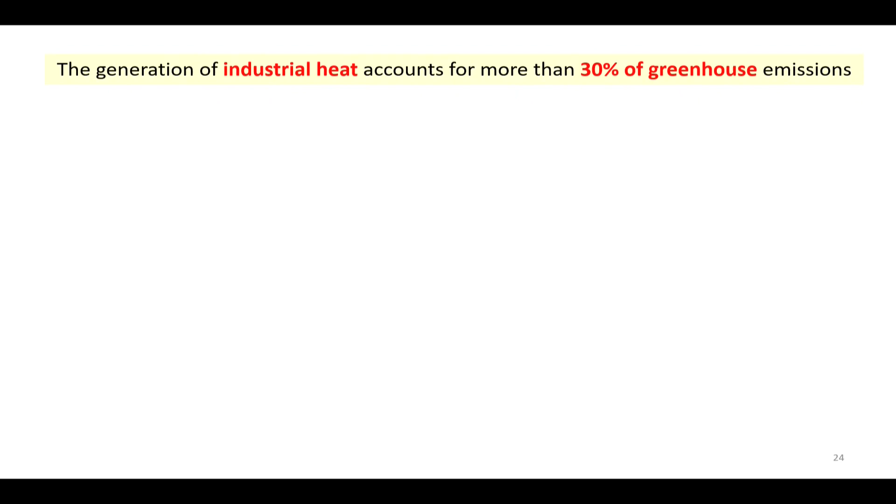The theme of the lab is to look at industrial heat. Industrial heating currently accounts for more than 30% of greenhouse emissions. And any kind of discussion about decarbonization should involve decarbonizing industrial heating.

This is why it matters. We talk about transportation—it's about 35% of emissions if you look at this pie chart. Industrial heating is almost the same amount, but we don't really talk about it much. And where people like me come in is where we talk about chemicals, manufacturing, and making materials.

That's about 20% of emissions, and that's a lot. My lab's specific theme is: can we use electromagnetic radiation to decarbonize industrial heating? I'll explain what all of that means. We use terms like process intensification.

Many times when you're cooking materials or making materials for things like your batteries or other devices, you have large furnaces running at temperatures exceeding thousands of degrees Celsius, for something on the order of 10 to 15 to 20 hours. That's a lot of wasted energy, emissions, it's dangerous. We are trying to zap these processes so that instead of applying heat for a prolonged period of time, you apply it for almost minutes.

The best example is how you microwave things at home. Microwaves are a form of directed energy that can dump a lot of energy, heat, into samples and speed up processes—sometimes the process can become an order of magnitude faster.

My lab focuses on ceramics because they are almost the non-sexy materials of the world. We need them for everything. Open up your car, there are millions of these capacitors. Open up your iPhone, thousands of these capacitors. They are ceramics, extremely stable. They're on space shuttle tiles, automotives, everything. It's a $400 billion industry, and none of us think about them.

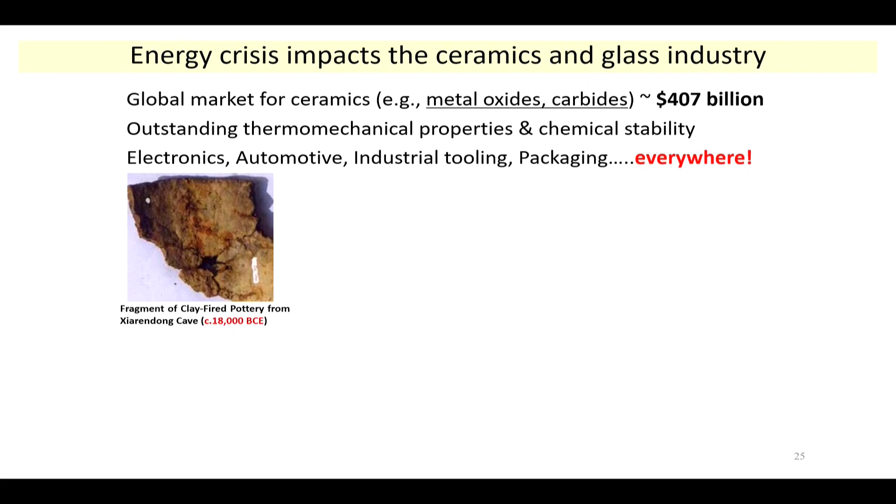They are the oldest materials humankind has made. In 18,000 BCE, we were in the caves, we shaped clay and put it into fire to make pottery. In 2024, this is pretty much the same approach of making ceramics, where we shape things and blast them with heat—a very primitive approach for a civilization that is pushing the frontiers of artificial intelligence.

These materials are in everything, including our luxury watches and other types of appendages. But when you make these materials, the emissions exceed 2 to 3 orders of magnitude over the national average for any of the nasty gases you can think about. And what is the irony here? Every material, including your electrified cars and batteries, contain these materials.

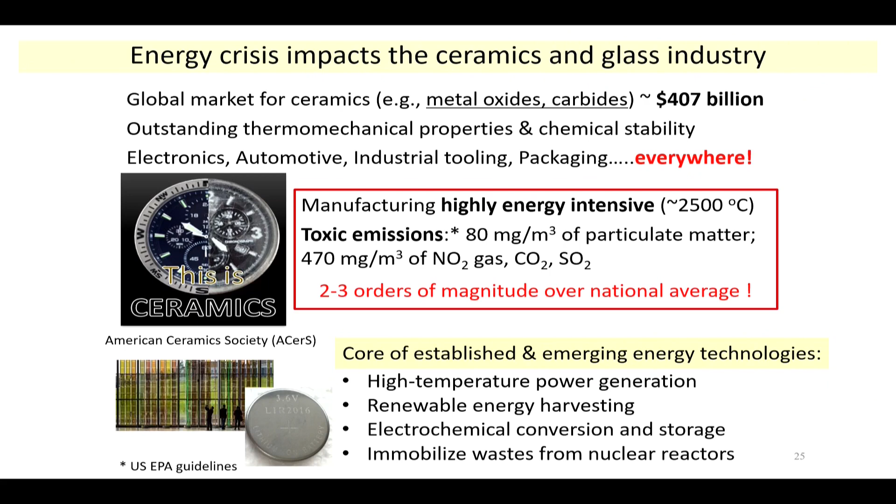So by trying to save the planet, we are going to scale up manufacturing of these materials and essentially close the loop in breaking the planet down. We need a different approach to make these materials. That's my pitch. So in our lab, we have fun trying to manipulate processes.

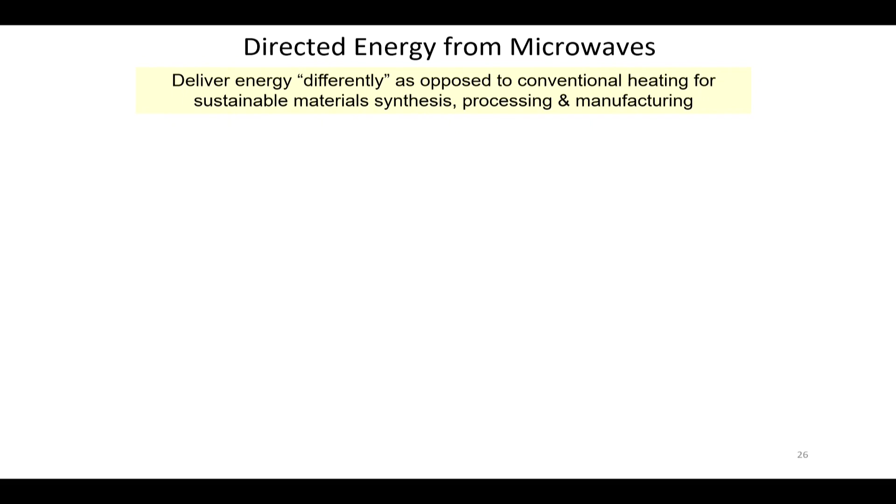One way to do this is by directed energy deposition. We dump a lot of energy into these processes, exactly how you cook in a microwave. This is a typical Friday afternoon in our lab.

Don't try this at home. Oh, this is what happens if you put metals in the microwave. Everybody tells you not to put a fork in the microwave. I'm telling you, you can go home and do it right now.

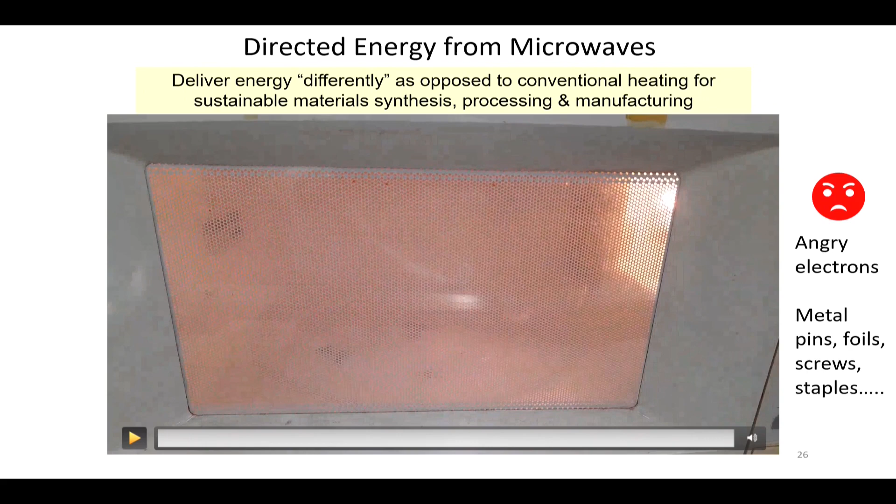You'll be fine—you have to make sure there are no paper towels or other stuff, pizzas, inside, because the sparks are electrons where a lot of energy has been dumped into them and they have nowhere to go. If you have paper towels, the electrons will jump into the paper towels and catch fire. With no paper towels, you can do this all day, and we do that in our lab. What's more dangerous is grapes, because if you microwave grapes, this happens.

Please go home and try this, okay? I'm not taking any liability. I mean, what's happening with the grapes? This is a real experiment.

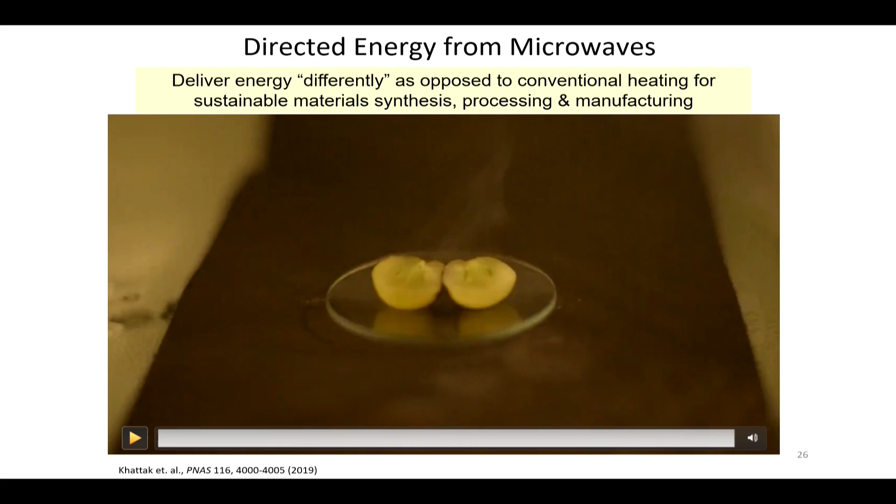Grapes are water, right? And microwaves are 2.45 gigahertz, your home microwave. The water in the grape hemisphere is coupled to the microwave, and in the gap there's an intensification of that electric field. It's so powerful a plasma is generated right at the interface of the grapes, and it ionizes all the crap that's in your microwave, and that's the plasma. We have measured the electric fields in that interface, and that's about 10 million volts per meter. It's the order of a lightning strike in a storm.

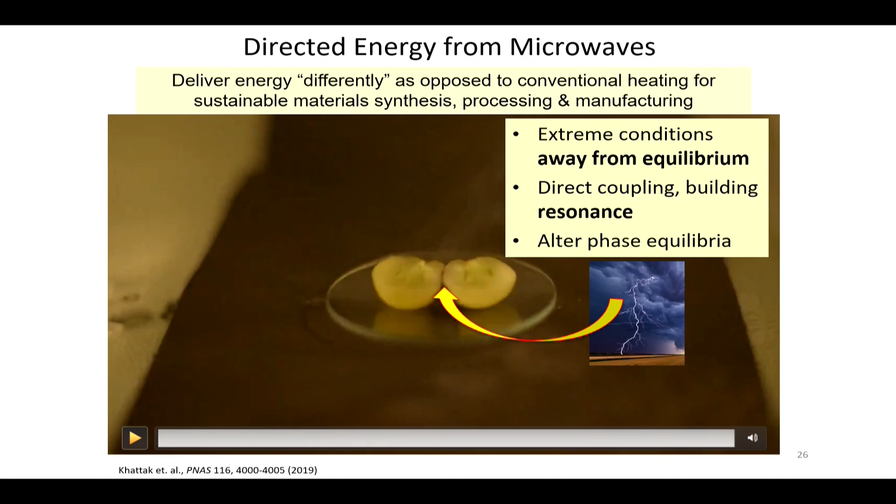So the question is, there's all this energy coming out of grapes. Why can't we use this energy for decarbonizing some of our hard-to-decarbonize processes? A lot of people in my community do that.

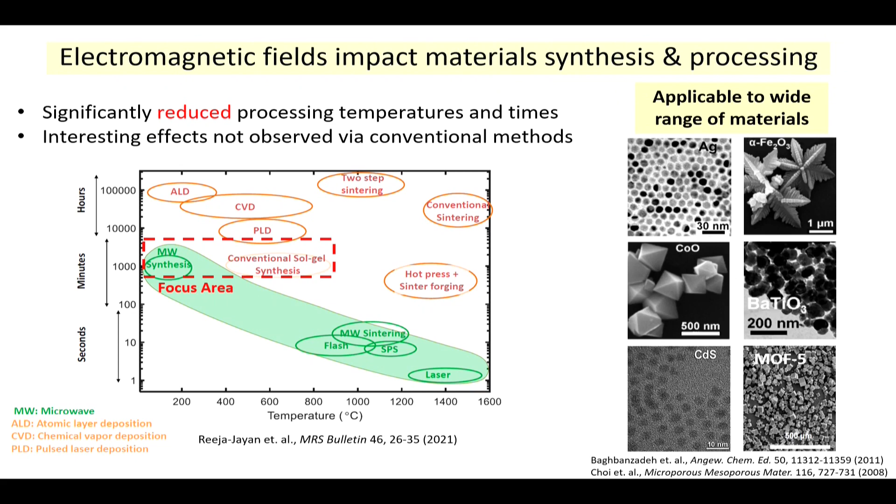These are process maps where we can change the time and temperature of various processes, shown here in different colors. When you apply these various fields, especially microwaves, you're running processes at shorter times and temperatures. Over the years, my group has synthesized an entire library of materials with all of that.

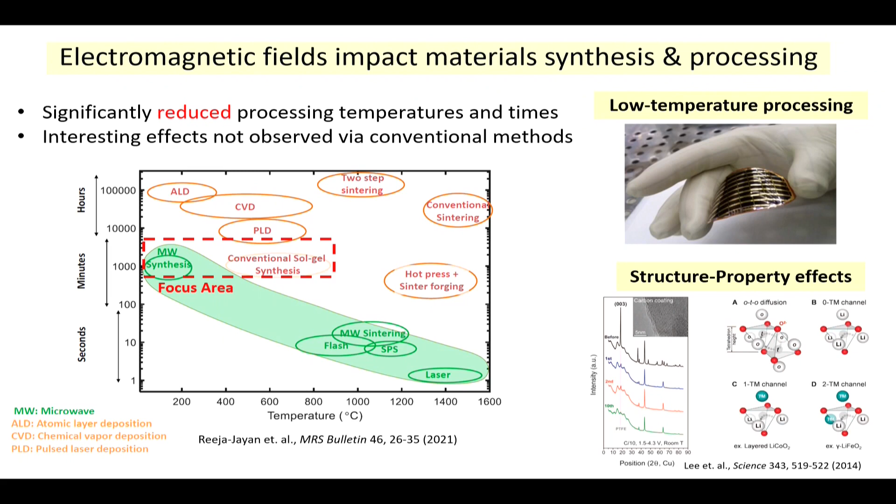The processes are very low temperature, so you can integrate ceramics with polymers, for interesting soft electronic applications. You can completely destructure the material to generate a function that is of interest to you. We have a lot of work in understanding dopants and other kinds of disorder that the field generates, but that's not the topic of interest today.

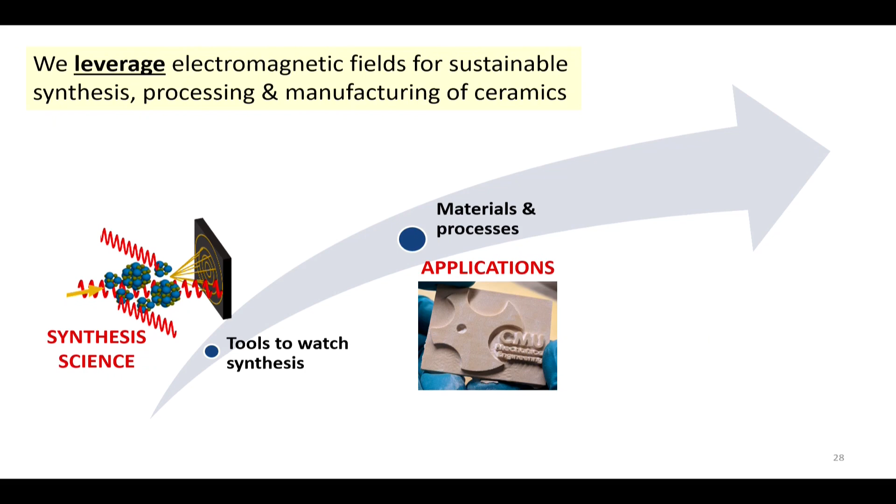Your home reactor is 1,000 watts, right? We, under certain conditions, can go up to megawatts and gigawatts with microwaves. Did you know you could do that? And with that, we can create large specimens of alumina, yttrium-stabilized zirconia, silicon carbide, and other materials.

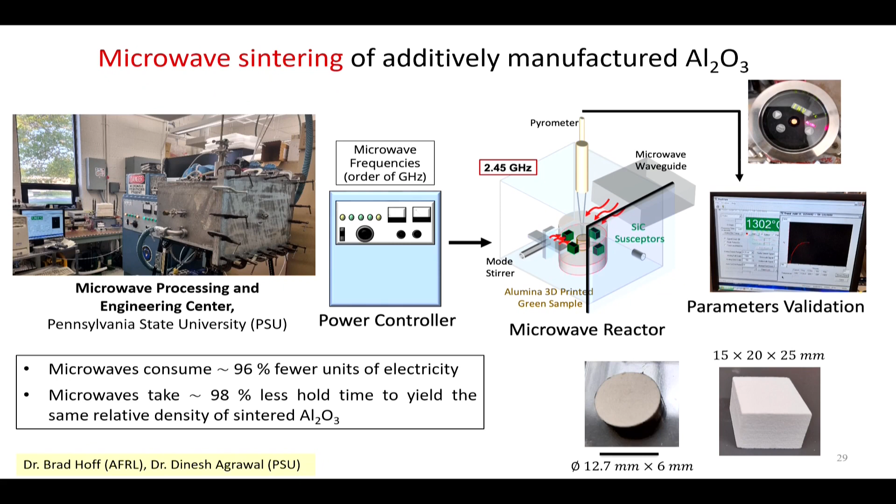We use almost 95%, 96% less electricity, because try to cook rice in a microwave versus on a stovetop — we're tapping into the same dielectric heating physics. We save all this energy mainly because we ramp up to really high temperatures in minutes as opposed to hundreds of minutes.

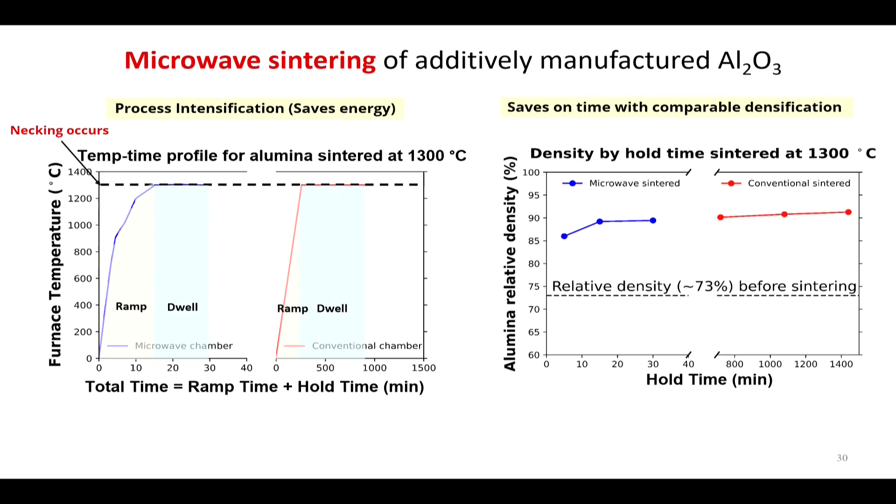We have also done extensive work characterizing the process to understand that for every minute our material is cooked in the microwave, it takes about 48 to 50 minutes in a conventional system. So this time saving is really where we save on energy.

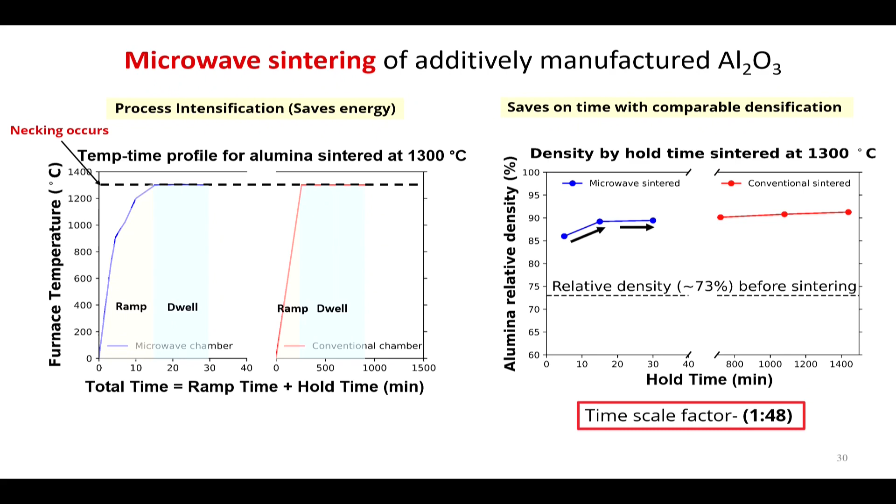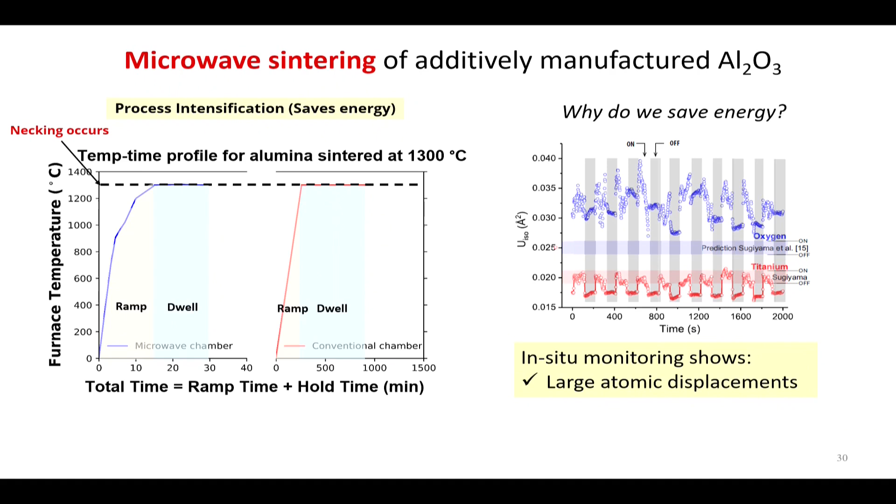My wonderful team of students and postdocs have tried very hard to understand what's happening. Very, very briefly, we actually shake atoms out of their sites so they have more space to move around, and that enhances diffusion. That's why things speed up.

We have also used this tech to print materials in all kinds of shapes, and this is an avenue for 3D printing ceramics, because you can print metals, you can print polymers, but it's extremely hard to print these ceramic things. So that's something our explorations have enabled over the years.

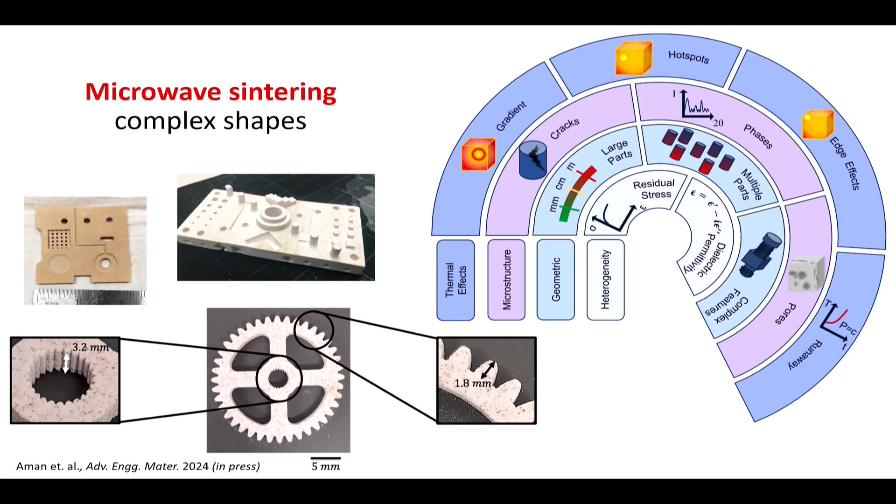This did not come easy. We had to understand the complex interrelationships between electromagnetic fields, thermal and heat transfer effects, microstructure, and other kinds of materials-related problems in these systems to come to these solutions.

Finally, I am now at the stage where we are rolling out some of this into startup companies that spin out of the lab, and we were able to use some of these materials within a lithium-ion battery. What we found is that a composite version of this material can improve the life of a battery. In this particular case, it makes a battery last about 17 times longer.

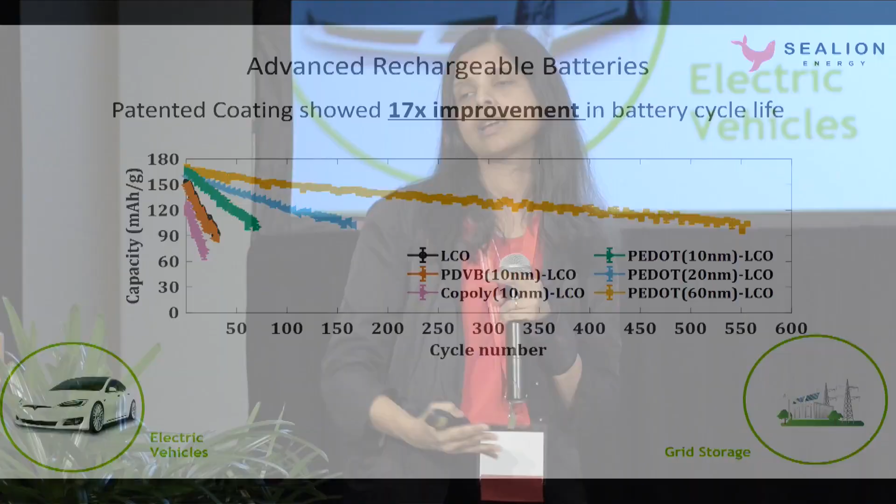So that's what my company, SeaLion, does. What we think is happening is the specific properties of the material help us protect the ion and keep it cycling longer. It's a way for us to contribute to a more sustainable way of energy storage.

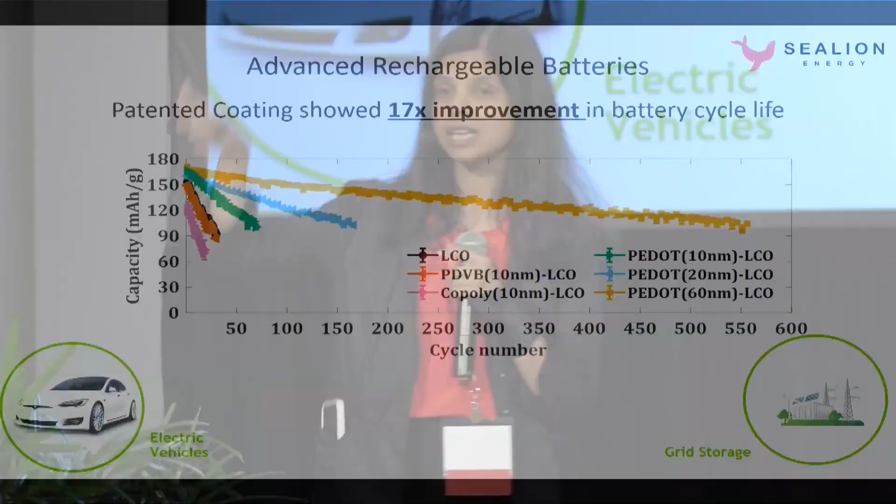Instead of having batteries that you throw away, we can have batteries with longer durability, which once they finish their life in something like an electric car, can have a second life in something like a grid or stationary storage application. So I think I should be approaching my 10 minutes.